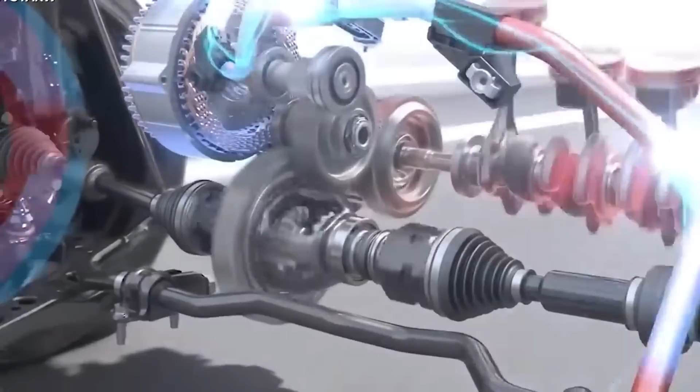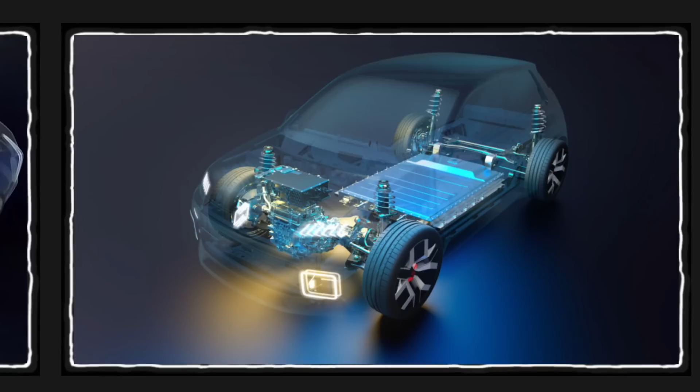Toyota, the global automotive leader, faces stiff competition from the burgeoning EV market and emerging rivals. To maintain its dominance, Toyota is unveiling a groundbreaking engine designed to reshape the industry. What sets this engine apart, and how will it revolutionize the automotive landscape? Join us as we reveal Toyota's new engine that aims to surpass the EV market.

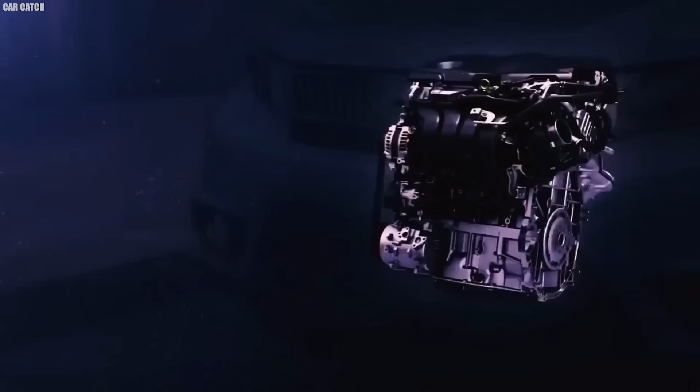The demand for traditional engines. In a world where electric vehicles are the talk of the town, Toyota has proven that there's still a strong demand for traditional engines. The Japanese automaker had its best year ever in 2023, selling an astonishing 11.2 million vehicles worldwide. But here's the surprising part. Electric cars contributed only a mere

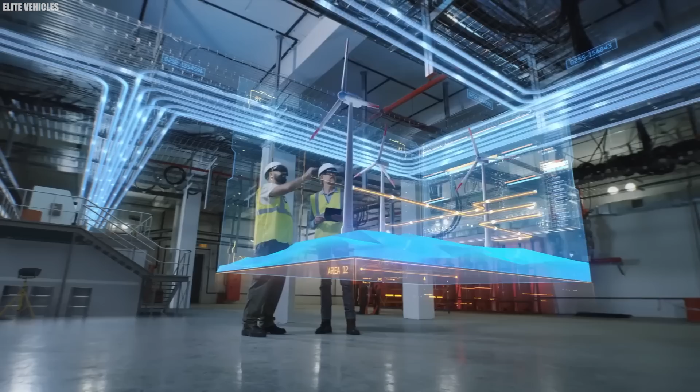0.926% to this success. That's right, out of the 11.2 million vehicles sold, only around 100,000 were electric. It's clear that despite the growing popularity of electric vehicles, many consumers still prefer the familiarity and reliability of traditional engines. Toyota's chairman believes that people should have the freedom to choose the type of vehicle that best suits their needs and preferences, without feeling pressured to go electric.

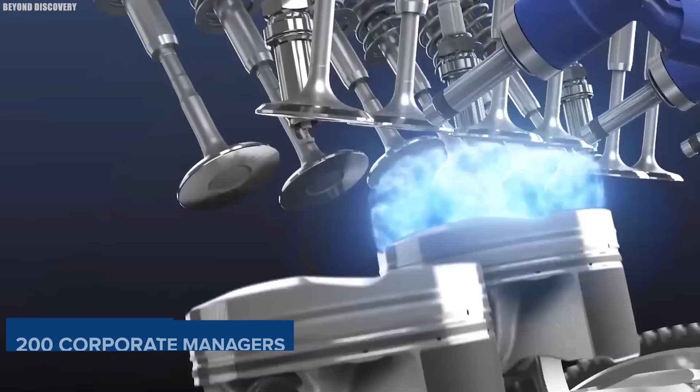He emphasized this point during a speech to 200 corporate managers and executives, where he also hinted at plans for a significant engine project that he had previously discussed at the 2024 Tokyo Auto Salon. But why is Toyota, a company known for its innovative hybrid technology, not fully embracing the electric vehicle trend?

The answer lies in their belief that the market for electric cars will be limited. Toyota estimates that even with technological advancements, electric vehicles will make up at most 30% of the market, with the remaining 70% consisting of traditional engines, hybrid cars, and fuel cell electric vehicles. This diverse approach to powertrain options allows Toyota to cater to a wider range of customers and driving conditions.

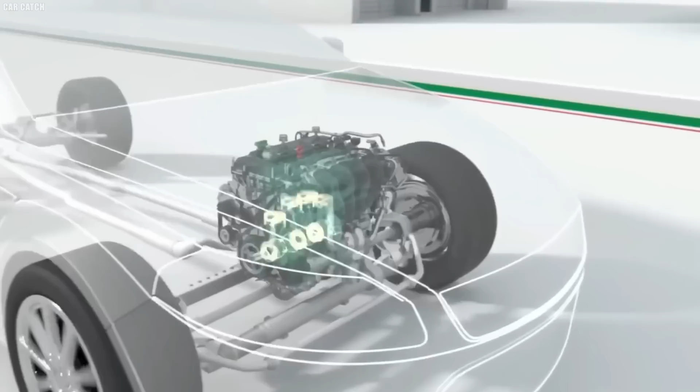Interestingly, Toyota sees hydrogen-powered engines as a promising solution for the future. By investing in the development of hydrogen technology, Toyota aims to offer vehicles that combine the benefits of clean energy with the performance and convenience of traditional engines.

Toyota's new combustion engine project for 2024. Toyota has been making waves in the automotive industry with its revolutionary approach to engine technology. While other manufacturers are rushing to go all-electric, Toyota has taken a bold step in a different direction. At the 2024 Tokyo Auto Salon, the company announced plans for a groundbreaking combustion engine project that has the potential to change the game. So, what makes this new engine so special?

For starters, it's no ordinary combustion engine. Toyota has developed a hydrogen-powered engine that promises to deliver the performance of a traditional gasoline engine while emitting only water as a byproduct. This engine runs on hydrogen, one of the most abundant elements in the universe, and produces zero harmful emissions.

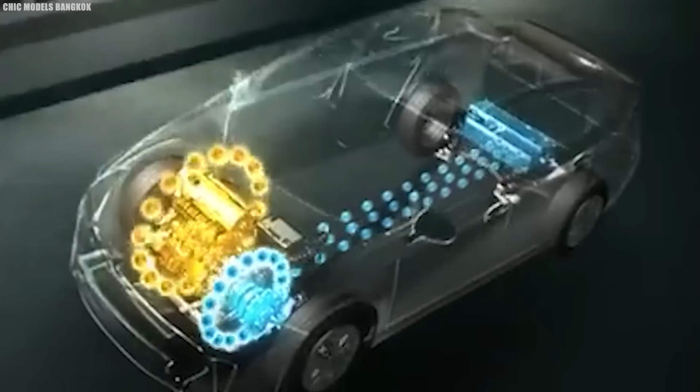But how does it work? The engine itself is quite similar to Toyota's existing hydrogen-powered models, such as the Corolla Cross H2 concept car. It features a 1.6-liter turbocharged 3-cylinder engine that has been specifically designed to run on hydrogen fuel. The hydrogen is stored in high-pressure tanks, similar to those in Toyota's fuel cell electric vehicle, FCEV, the Mirai. When the hydrogen is injected into the engine and ignited, it produces power just like a regular gasoline engine, but with the added benefit of being virtually pollution-free.

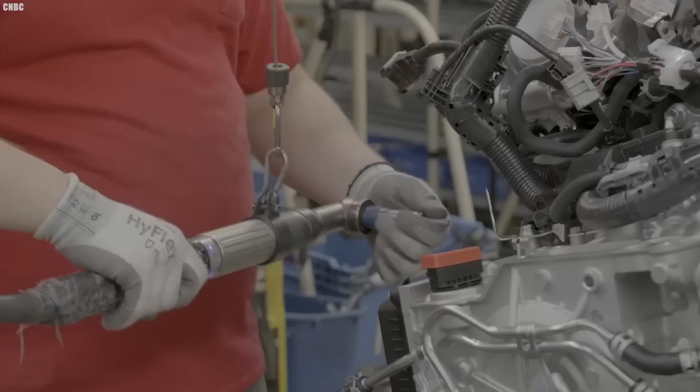One of the key advantages of Toyota's hydrogen engine is its versatility. Unlike electric vehicles, which require lengthy charging times and have limited range, hydrogen-powered cars can be refueled quickly and offer a driving range comparable to gasoline vehicles. This makes them a more practical option for people who need to travel long distances or don't have easy access to charging infrastructure.

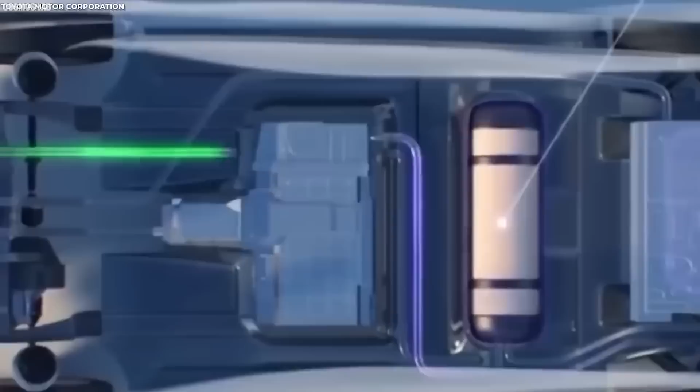Automakers' plans to switch to electric vehicles. While Toyota is making waves with its innovative hydrogen-powered engine, other automakers are doubling down on their plans to go all-electric. Many major players in the industry have set ambitious targets to phase out traditional combustion engines and shift their focus entirely to electric vehicles. One of the most notable examples is Jaguar, the iconic British luxury car brand. The company has announced that it will become an all-electric luxury brand by 2025, making it the first major automaker to commit to a completely electric lineup.

This move is part of Jaguar Land Rover's larger strategy to achieve net zero carbon emissions across its supply chain, products, and operations by 2039.

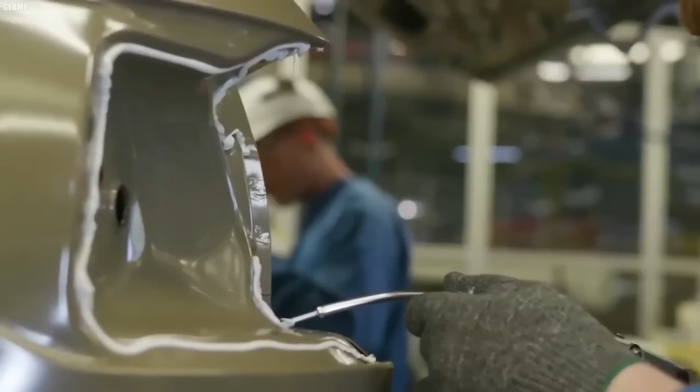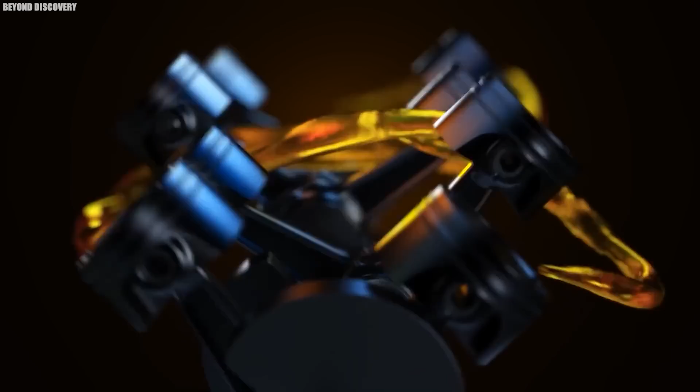Other luxury automakers are following suit. Bentley, known for its opulent vehicles, has pledged to offer only electric cars by 2030. Aston Martin, the British manufacturer famous for its association with James Bond, has also announced plans to electrify its entire lineup by the end of the decade. Even Rolls-Royce, the epitome of automotive luxury, is embracing the electric revolution with its first fully electric model, the Spectre, set to launch in 2023.

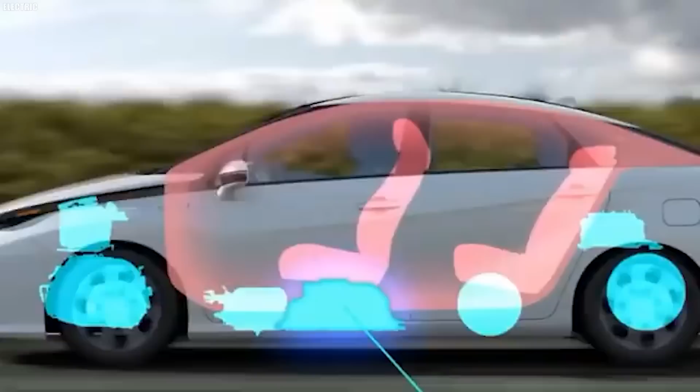But it's not just the luxury segment that's going electric. Mass-market automakers are also setting ambitious targets. Chrysler, the American automaker known for its minivans and muscle cars, has announced plans to go all-electric by 2028. The company's first battery electric vehicle, BEV, is set to debut in 2025, with additional models to follow in the coming years.

Volkswagen, one of the world's largest automakers, has also set its sights on electric dominance. The German company aims to launch 70 all-electric models by 2030 and expects BEVs to account for 50% of its global sales by the same year. To support this transition, Volkswagen is investing heavily in battery technology and charging infrastructure.

Mercedes-Benz, another German automaker, has announced plans to go all-electric by the end of the decade, provided that market conditions allow. The company is preparing to launch 3 new electric vehicle platforms in 2025, which will form the basis for a wide range of models across its lineup.

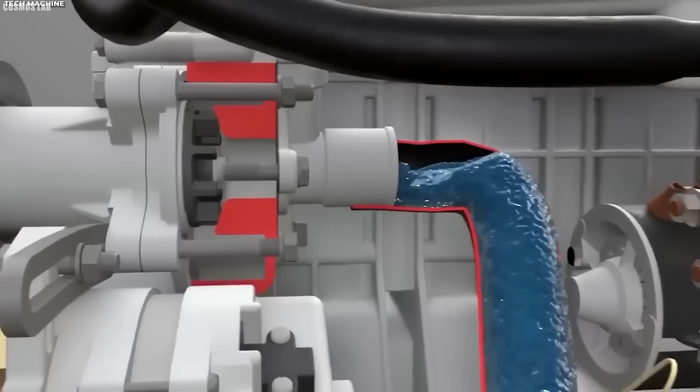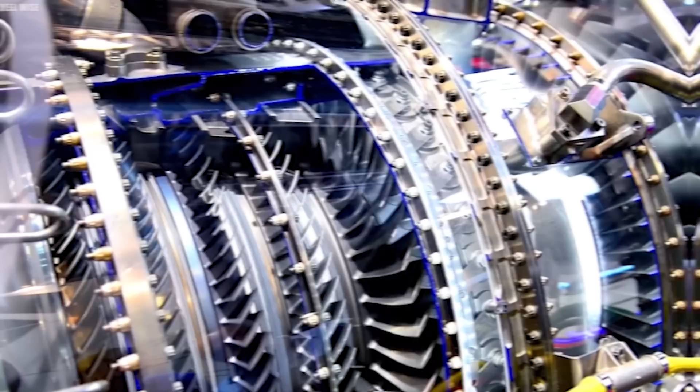Even Toyota's own luxury division, Lexus, has pledged to offer only electric vehicles in Europe, North America, and China by 2030. The brand aims to achieve carbon neutrality across its entire value chain by 2050, with electrification playing a key role in reaching this goal.

How hydrogen-powered engines work. Hydrogen-powered engines are a fascinating technology that promises to revolutionize the automotive industry. But how exactly do they work?

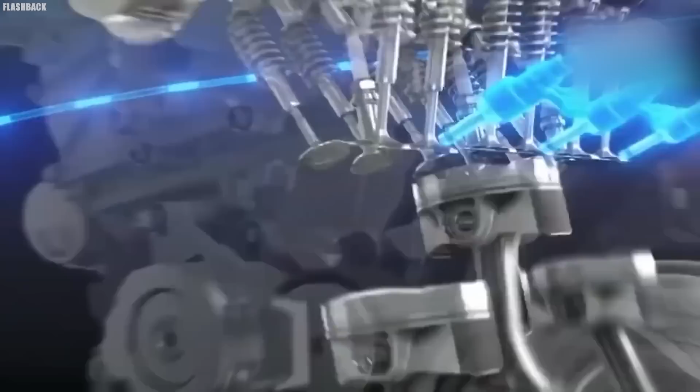At the heart of a hydrogen engine is a process called electrolysis, which involves extracting energy from water by separating hydrogen and oxygen atoms. To understand this process, let's take a closer look at water's molecular structure. Scientifically known as H2O, water consists of 2 hydrogen atoms bonded to a single oxygen atom. By applying an electric current to water, we can break these bonds and split the molecule into its constituent parts, hydrogen and oxygen gas. Once separated, the hydrogen gas becomes a potent fuel source.

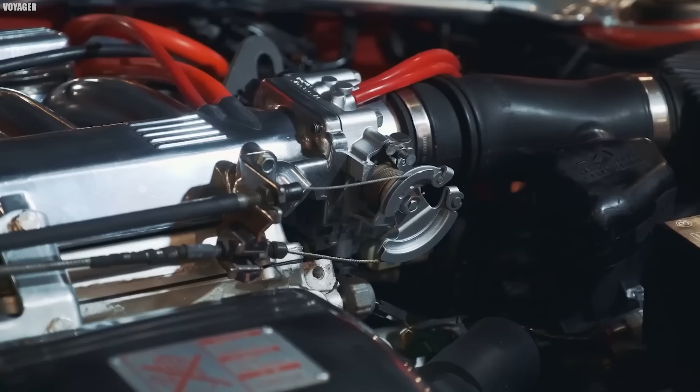In fact, hydrogen has the highest specific energy density of any non-nuclear power source, meaning it packs a serious punch when it comes to generating energy. This is where the real magic of a hydrogen engine happens. Inside the engine, the hydrogen gas is injected into the combustion chamber, just like gasoline in a traditional engine. However, instead of mixing with air and igniting to create an explosion, the hydrogen gas undergoes a chemical reaction with oxygen. This reaction produces heat, which drives the engine's pistons and generates power.

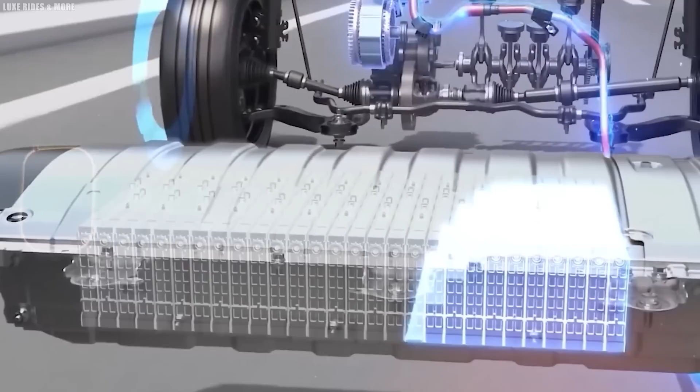But here's the best part. The only byproduct of this reaction is pure water vapor. That's right, a hydrogen engine only emits water from its tailpipe. This makes it an incredibly clean and environmentally friendly alternative to gasoline-powered engines, which release harmful carbon dioxide and other pollutants into the atmosphere. To make this process work efficiently, hydrogen engines require some special components.

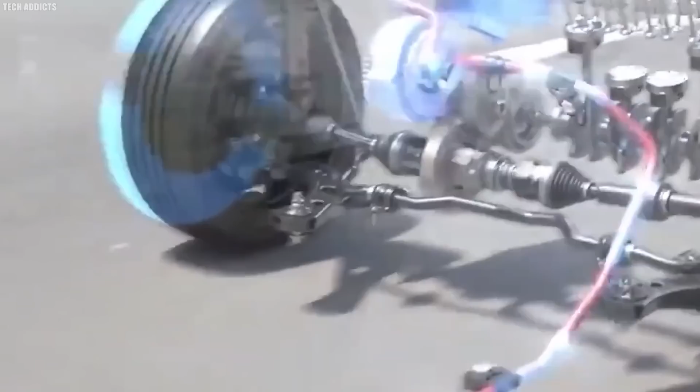The fuel injectors, for example, need to be designed to handle the unique properties of hydrogen gas, which is much lighter and more flammable than gasoline. The cylinder heads, pistons, and valves also need to be reinforced to withstand the high pressures and temperatures generated by hydrogen combustion. Despite these challenges, Toyota has made significant strides in developing practical hydrogen engines.

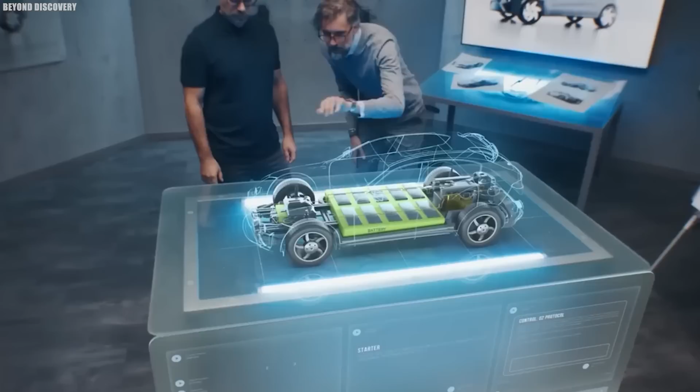The company's latest prototype, the Corolla Cross H2 concept car, features a 1.6-liter turbocharged 3-cylinder engine that runs entirely on hydrogen. With a range of around 300 miles and a refueling time of just a few minutes, this vehicle showcases the potential of hydrogen power to compete with traditional gasoline engines.

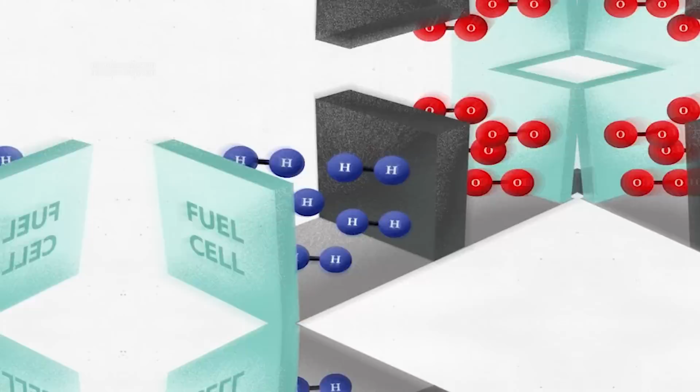Of course, there are still some hurdles to overcome before hydrogen engines can become a mainstream technology. Infrastructure for producing and distributing hydrogen fuel is still limited, and the cost of hydrogen vehicles remains higher than their gasoline counterparts. However, with continued investment and innovation from companies like Toyota, it's only a matter of time before hydrogen power becomes a viable option for drivers around the world.

New fuel technologies. When it comes to alternative fuel technologies, there are a few key players in the game.

Hydrogen combustion engines, fuel cell electric vehicles (FCEVs), and the new one that's making waves, water engines. But how do these different technologies stack up against each other? First, let's take a closer look at how water engines work.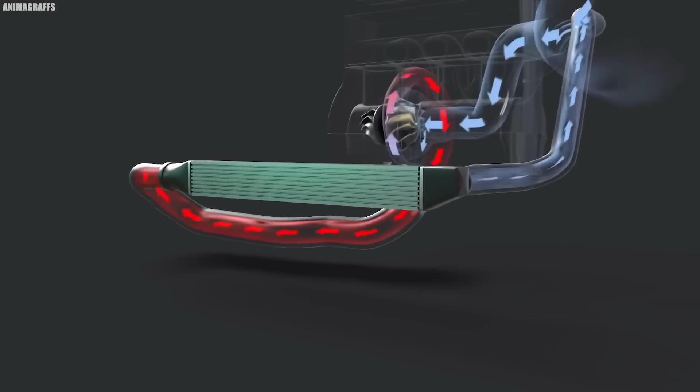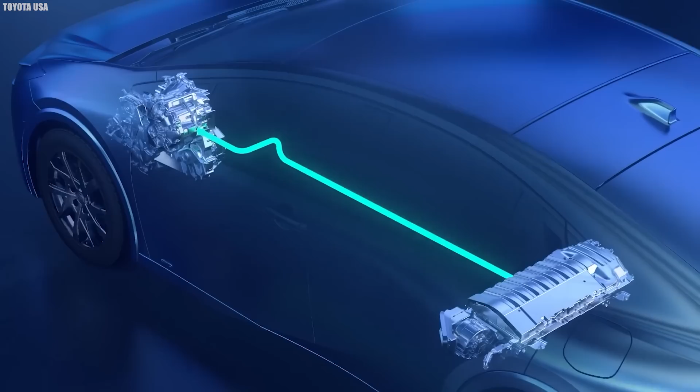A water engine uses water as its primary fuel source. The engine extracts hydrogen from water molecules through a process that involves passing an electric current through the water. The resulting hydrogen gas is then used to power the engine, either through combustion or in a fuel cell. The byproduct of this process is pure water vapor, making it an incredibly clean and environmentally friendly alternative to traditional fossil fuels.

But the benefits of water engines don't stop there. When it comes to storage, water engines have a clear advantage over their competitors. Unlike hydrogen combustion engines and FCEVs, which require specialized storage systems to keep the hydrogen fuel under high pressure and at specific temperatures, water engines can use plain old H2O as their fuel source. This means the fuel can be stored in virtually any plastic container, making it incredibly easy and inexpensive to transport and distribute. In contrast, the specialized storage systems required for hydrogen fuel can be bulky, heavy, and expensive, adding significant cost and complexity to the vehicle.

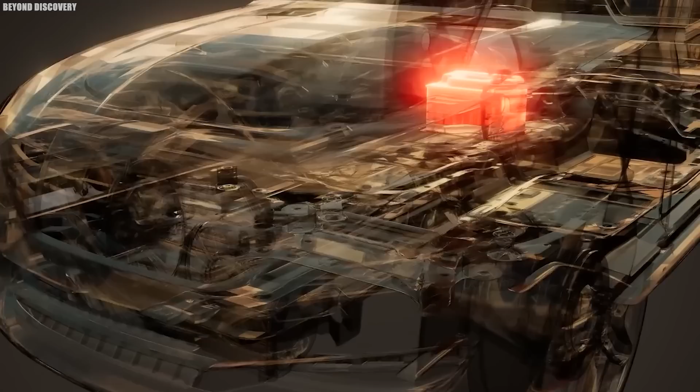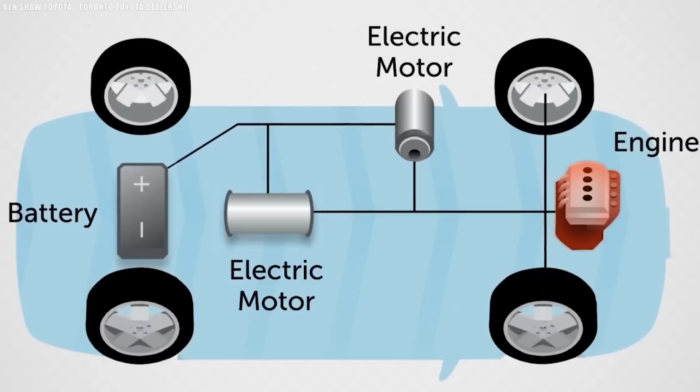But it's not just the storage systems themselves. The process of producing and storing hydrogen fuel is also a major factor to consider. Hydrogen is notoriously difficult to contain, as it can easily escape through even the tiniest of leaks. This means storage tanks for hydrogen fuel need to be heavily reinforced and constantly monitored, which adds even more cost and complexity to the equation. In fact, some estimates suggest that the cost of producing and storing hydrogen fuel could be up to 3 times higher than the cost of producing and storing gasoline.

So what does this mean for consumers? Well, it's pretty simple: higher costs. Because of the expensive storage systems and production processes required for hydrogen fuel, the price of hydrogen-powered vehicles is likely to be significantly higher than that of traditional gasoline-powered vehicles. This could make hydrogen combustion engines and FCEVs a tough sell for many consumers, especially those on a tight budget.

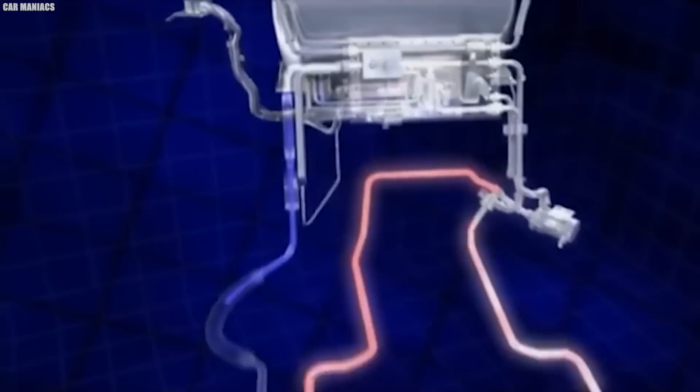But what about the environmental impact? This is where water engines really shine. Because they use water as their fuel source, water engines produce zero emissions, aside from a small amount of water vapor. This makes them an incredibly clean and environmentally friendly alternative to traditional gasoline engines, which emit harmful pollutants like carbon dioxide and nitrogen oxides. Hydrogen combustion engines and FCEVs are also much cleaner than gasoline engines, but they still produce some emissions in the form of water vapor and trace amounts of nitrogen oxides.

Of course, there are still some challenges to overcome when it comes to water engines. For one, the technology is still relatively new and untested, so there are likely to be some snags to resolve in the early stages of development. Additionally, the infrastructure for distributing and storing water as a fuel source is not yet in place, which could make it difficult for water engines to gain widespread adoption in the short term.

The internet was recently abuzz with a major headline from Toyota's CEO: 'This new engine will destroy the entire EV industry.' In an ambitious move to compete with the growing electric vehicle market, Toyota announced its development of a revolutionary water-powered engine. Yes, you heard that right. An engine fueled by nothing but ordinary H2O.

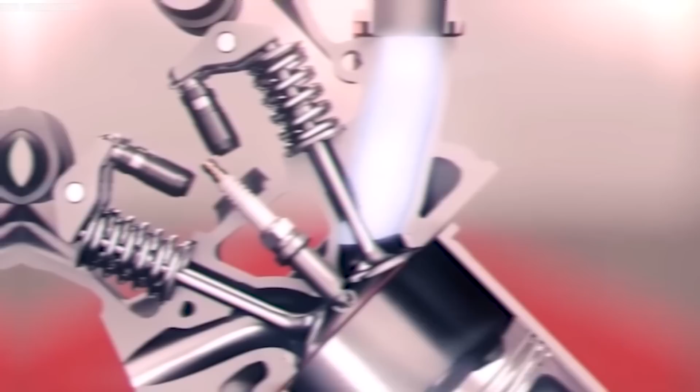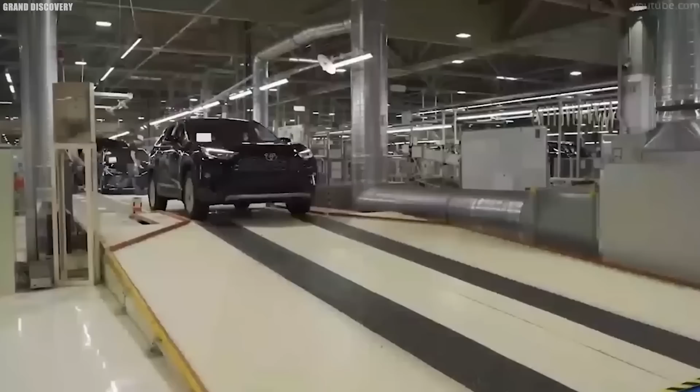Despite the excitement, developing a viable water-powered engine faces significant hurdles. Hydrogen storage is a major challenge, as it's a highly flammable gas requiring specialized high-pressure tanks. This adds complexity, cost, and potential safety risks to the vehicle. Nevertheless, Toyota remains optimistic about the potential of water-powered engines to revolutionize the automotive industry. The company has filed numerous patents and is actively developing prototypes and proof-of-concept vehicles. If Toyota succeeds in overcoming these challenges, this new technology could indeed disrupt the EV market, challenging its dominance and potentially reshaping the automotive landscape.

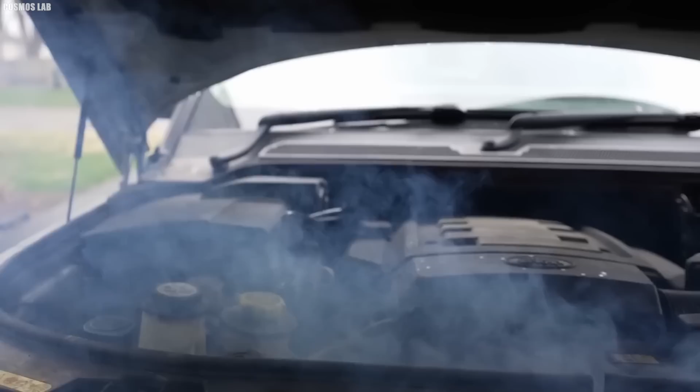Daily usability and performance. When it comes to alternative fuel technologies, one of the biggest concerns for consumers is how well they will perform in everyday driving situations. After all, what good is a fancy new engine if it can't get you from point A to point B reliably and efficiently? Fortunately, water engines have a lot to offer in terms of daily usability and performance. First and foremost, water engines pack a serious punch when it comes to energy output.

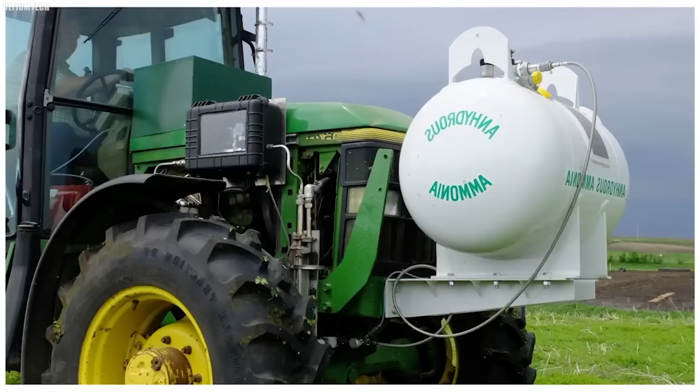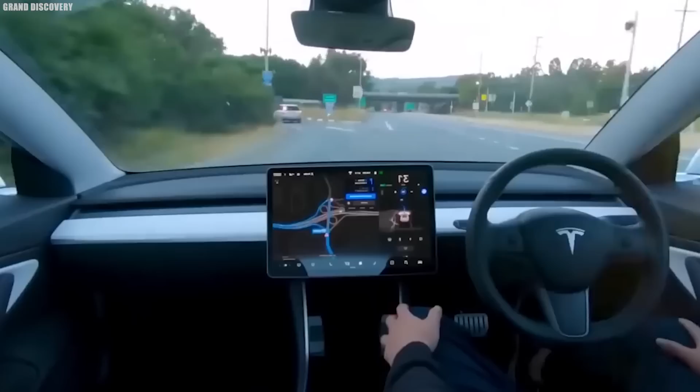In fact, some estimates suggest that water-powered engines could generate up to 3 times more megajoules of energy than traditional gasoline engines. This means water engines could potentially offer better acceleration, higher top speeds, and longer driving ranges than their gasoline-powered counterparts. But it's not just raw power.

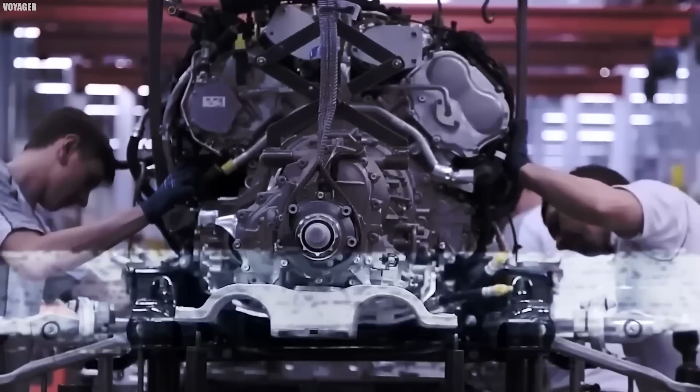Water engines also have some inherent safety advantages over other types of alternative fuel technologies. Because water is a non-flammable, non-toxic substance, the risk of fires or explosions in a water-powered vehicle is extremely low. This is in stark contrast to hydrogen combustion engines and fuel cell electric vehicles, which use highly flammable hydrogen gas as their fuel source. In the event of a crash or malfunction, a hydrogen-powered vehicle could potentially turn into a veritable bomb on wheels, putting the driver and passengers at serious risk.

Another major advantage of water engines is their relative simplicity and ease of production. Unlike electric vehicles, which require complex and expensive battery systems, water engines can be manufactured using many of the same components and production processes as traditional gasoline engines. This means automakers could potentially retool their existing manufacturing facilities to produce water engines, rather than having to build entirely new production lines from scratch.

But perhaps the biggest selling point for water engines is their cost effectiveness. Because water is an abundant and easily accessible resource, the cost of fueling a water-powered vehicle is likely to be much lower than the cost of fueling a gasoline-powered vehicle or an electric vehicle. In fact, some experts predict that the cost per mile of driving a water-powered vehicle could be as much as 50% lower than the cost of driving a gasoline-powered vehicle.

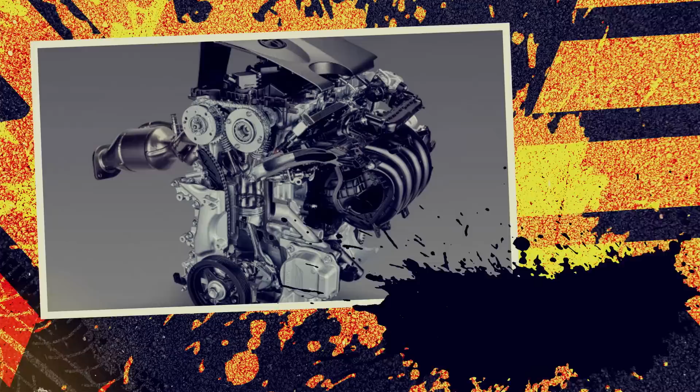Challenges and limitations. While hydrogen engines and water engines show immense promise as alternative fuel technologies, it's important to acknowledge the challenges and limitations that these industries currently face. From infrastructure and logistical issues to safety concerns and potential opposition from established players in the automotive industry, there are a number of hurdles that must be overcome before hydrogen and water engines can become mainstream.

One of the biggest challenges facing the hydrogen engine industry is the lack of infrastructure for producing, distributing, and storing hydrogen fuel. Unlike gasoline, which can be easily transported and stored using existing infrastructure, hydrogen requires specialized pipelines, storage tanks, and fueling stations. Building out this infrastructure from scratch would be a massive undertaking, requiring significant investment and coordination between government agencies, private companies, and local communities.

Another major challenge is the issue of hydrogen storage itself. As a gas, hydrogen is extremely difficult to compress and store in a way that is both safe and efficient. Current hydrogen storage systems are bulky, heavy, and expensive, which adds significant cost and complexity to hydrogen-powered vehicles. Additionally, hydrogen gas can be highly flammable and explosive if not handled properly, which raises serious safety concerns for both drivers and mechanics.

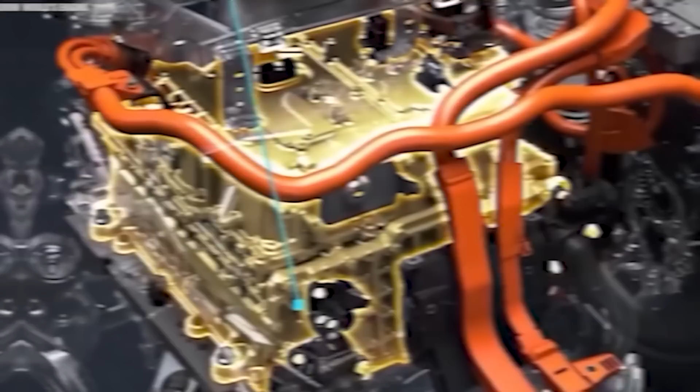Speaking of safety, hydrogen engines also face potential opposition from regulatory agencies and consumer advocacy groups who may be wary of the risks associated with hydrogen fuel. In the event of a crash or malfunction, a hydrogen-powered vehicle could potentially turn into a veritable bomb on wheels, putting the driver and passengers at serious risk. While companies like Toyota are working hard to address these safety concerns through advanced engineering and rigorous testing, it may take some time to convince the public that hydrogen-powered vehicles are truly safe and reliable.

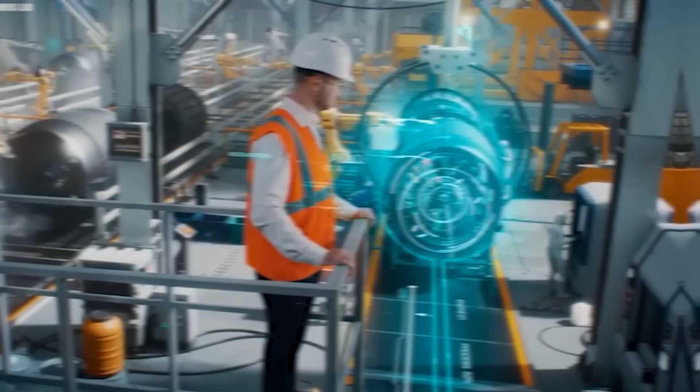But perhaps the biggest challenge facing the hydrogen engine industry is the potential opposition from established players in the automotive industry. Companies like Tesla and General Motors have invested heavily in electric vehicle technology, and they may see hydrogen engines as a threat to their bottom line. Additionally, oil and gas companies may be reluctant to support the development of alternative fuel technologies that could undermine their core business model. Despite these challenges, however, there are also a number of factors working in favor of the hydrogen engine industry.

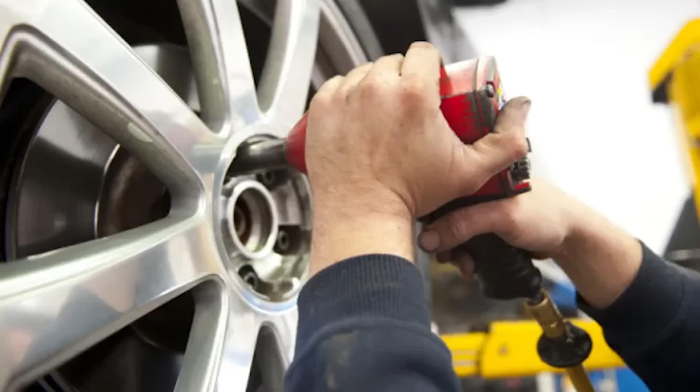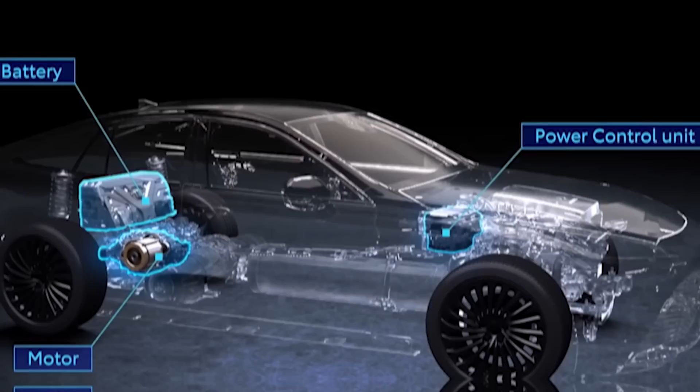For one, hydrogen engines have the potential to significantly reduce greenhouse gas emissions and combat climate change, which is becoming an increasingly urgent priority for governments and consumers alike. Additionally, hydrogen engines could help reduce our dependence on foreign oil, which has important geopolitical implications. Furthermore, the development of hydrogen engines could create new economic opportunities and jobs in the automotive industry, particularly in areas related to fuel production, distribution, and storage. As more companies invest in hydrogen engine technology, we can see the emergence of a whole new ecosystem of suppliers, manufacturers, and service providers, all working together to bring this technology to market.

Toyota's 1.6-liter three-cylinder turbo hydrogen engine.

When it comes to alternative fuel technologies, Toyota is a company that is always pushing the boundaries of what's possible. Their latest innovation is a 1.6-liter three-cylinder turbo hydrogen engine that promises to combine the power and performance of a traditional gasoline engine with the environmental benefits of hydrogen fuel. Let's take a closer look at this groundbreaking technology and what it could mean for the future of the automotive industry.

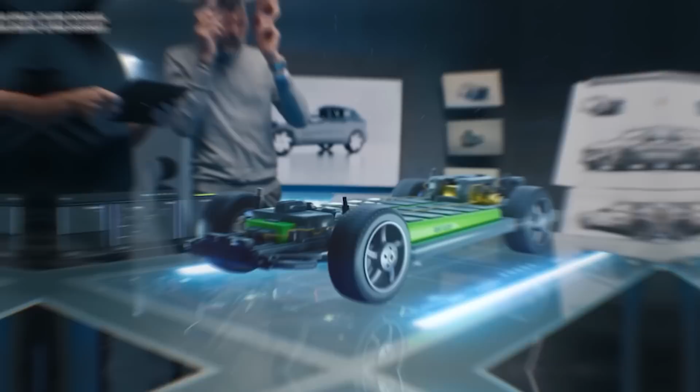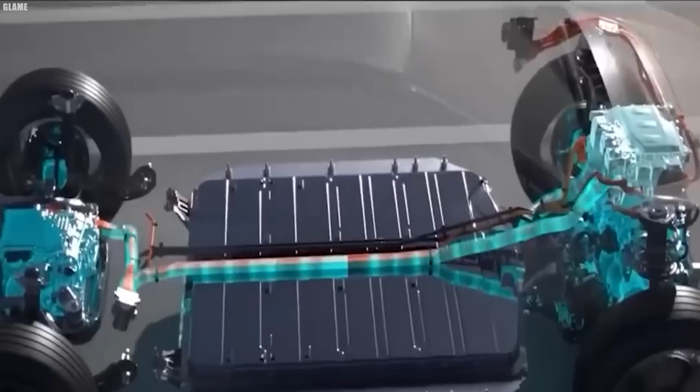At the heart of Toyota's new engine is a 1.6-liter three-cylinder turbocharged power plant that is based on the same platform as the engine found in the GR Yaris, a high-performance hatchback that has been praised for its speed and agility. However, unlike the GR Yaris engine, which runs on gasoline, Toyota's new engine has been specifically designed to run on hydrogen fuel.

To make this possible, Toyota's engineers had to make a number of significant modifications to the engine. For one, they had to replace the traditional fuel injection system with a high-pressure hydrogen direct injection system that can deliver the hydrogen fuel directly into the engine's combustion chamber. This allows more precise control over the fuel-air mixture and helps optimize performance and efficiency.

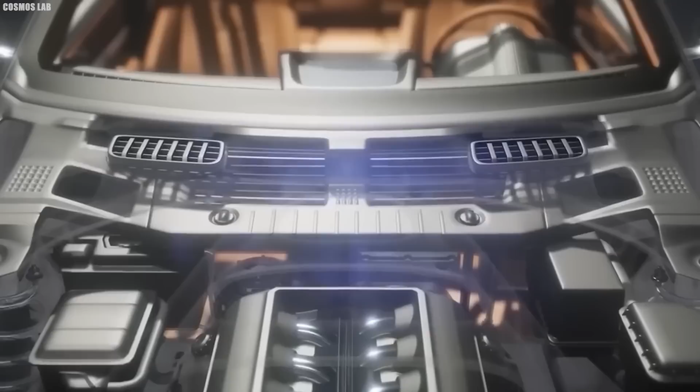Another key modification was the addition of a specially designed turbocharger that can handle the unique properties of hydrogen fuel. Because hydrogen is a much lighter gas than gasoline, it requires a different type of turbocharger that can spin at much higher speeds and generate more boost pressure. Toyota's engineers were able to develop a turbocharger that can operate at up to 150,000 RPM, which is significantly higher than the turbochargers used in traditional gasoline engines.

But perhaps the most impressive aspect of Toyota's new engine is its performance. Despite running on hydrogen fuel, which has a lower energy density than gasoline, the 1.6-liter three-cylinder turbo engine is able to produce an impressive 295 horsepower. This is largely thanks to the high-pressure hydrogen direct injection system, which allows for a more efficient combustion process and helps to extract more power from the fuel.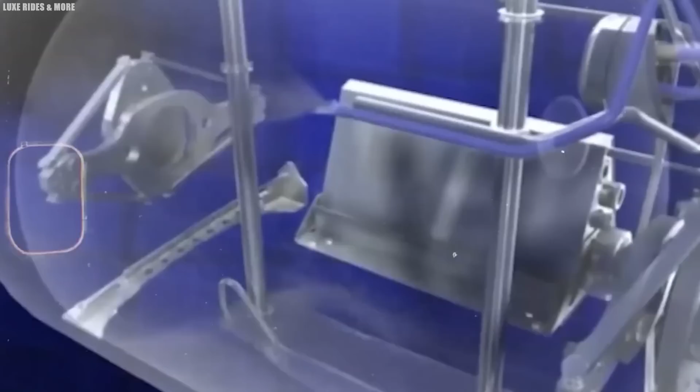Of course, performance is only one part of the equation when it comes to alternative fuel technologies. The other key factor is environmental impact, and this is where Toyota's new engine really shines. Because it runs on hydrogen fuel, which produces only water vapor as a byproduct of combustion, the 1.6-liter three-cylinder turbo engine has the potential to significantly reduce greenhouse gas emissions and combat climate change.

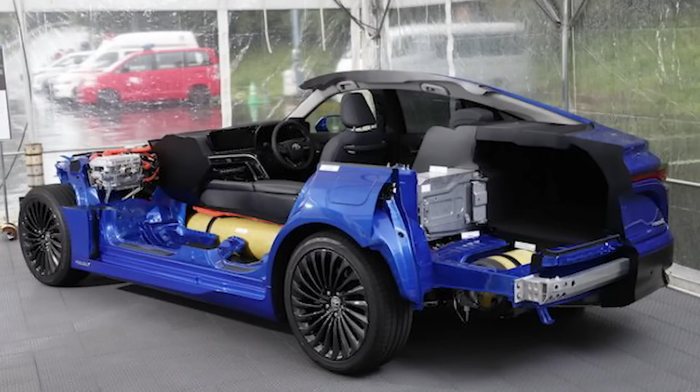In fact, Toyota has already begun testing the engine in a modified version of the Corolla Cross, a popular crossover SUV. The Corolla Cross H2 concept, as it's known, has been undergoing real-world testing in Japan, and the results so far have been extremely promising. According to Toyota, the Corolla Cross H2 concept has a driving range of around 400 miles on a single tank of hydrogen fuel, which is comparable to many gasoline-powered vehicles.

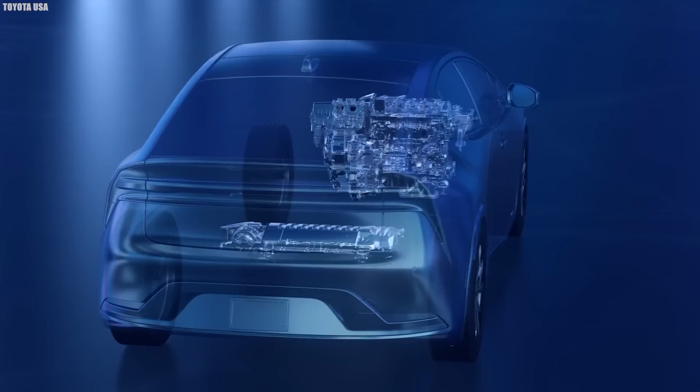But Toyota isn't stopping there. They are also working on developing a hydrogen fuel cell system that can be used in conjunction with the 1.6-liter three-cylinder turbo engine to create a hybrid powertrain that is even more efficient and environmentally friendly. This system would use a fuel cell to generate electricity from hydrogen fuel, which could then be used to power an electric motor and provide additional torque and power to the engine.

Performance and driving experience of hydrogen-powered vehicles. Performance is often a major concern for drivers, and the biggest question always on their minds is whether a hydrogen-powered car can keep up with its gasoline-powered counterparts. Can it provide the same performance that car enthusiasts crave?

The answer, according to Toyota, is a resounding yes. Toyota's hydrogen-powered vehicles, such as the Mirai and the experimental Corolla Cross H2 concept, boast impressive performance specs that rival those of traditional gasoline engines. The Mirai, for example, can produce up to 182 horsepower, allowing it to accelerate from 0 to 60 miles per hour in just 9.2 seconds. While this may not be on par with high-performance sports cars, it's more than enough power for everyday driving situations.

But it's not just raw power. Toyota's hydrogen-powered vehicles also deliver a driving experience that feels remarkably similar to that of a gasoline-powered car. The throttle response is instant and linear, providing a sense of immediacy and control that is often lacking in electric vehicles.

The engine sound, while different from a traditional gasoline engine, still provides a satisfying growl that enhances the driving experience. In fact, Toyota has even proven hydrogen power potential in high-performance applications.

In 2021, the company entered a modified Corolla Sport equipped with a hydrogen-powered engine in the Super Taikyu series, a grueling endurance racing series in Japan. The car, based on the GR Yaris platform, competed in the ST-Q class and demonstrated impressive speed and reliability, completing the race without any major issues.

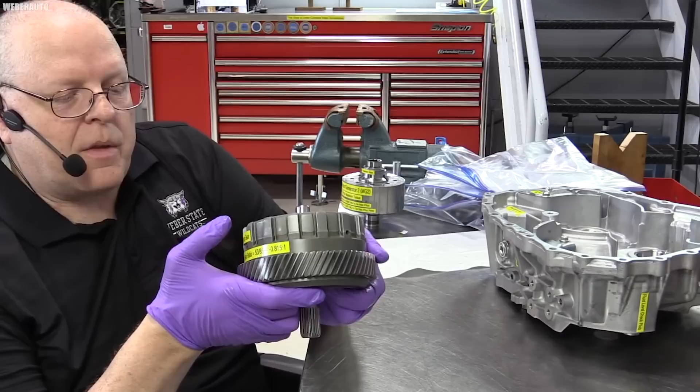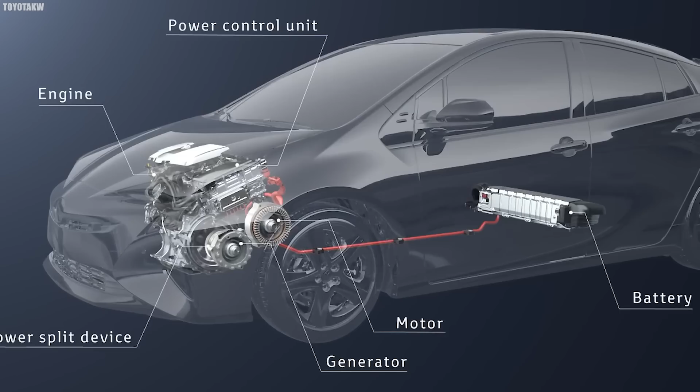But hydrogen power's benefits go beyond performance. Hydrogen-powered vehicles also offer significant environmental advantages over traditional gasoline engines and even hybrid electric vehicles (HEVs) and plug-in hybrid electric vehicles (PHEVs). The most obvious benefit is the lack of CO2 emissions. When hydrogen is used as a fuel, the only byproduct of the combustion process is water vapor. That means hydrogen-powered vehicles can operate with zero CO2 emissions, making them a much cleaner alternative to gasoline engines.

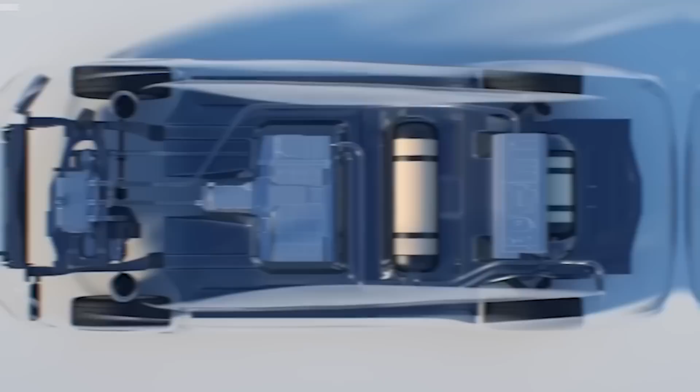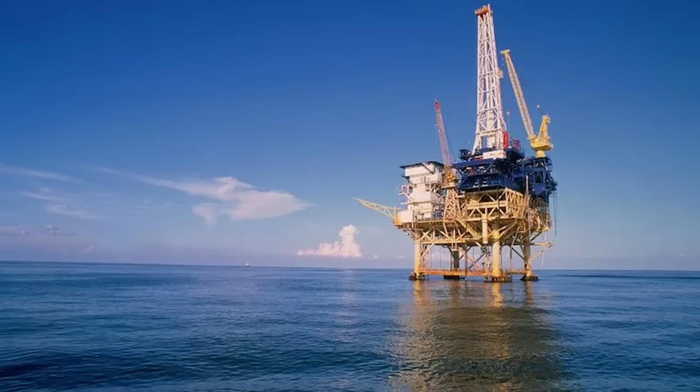But the environmental benefits don't stop there. The process of producing hydrogen fuel can also be much cleaner than the process of extracting and refining fossil fuels. When hydrogen is produced using renewable energy sources, such as solar or wind, the entire fuel life cycle becomes carbon neutral. This stands in stark contrast to the production of gasoline, which involves drilling for oil, transporting it to refineries, and then burning it in engines, releasing CO2 and other pollutants into the atmosphere at every step of the process.

Even HEVs and PHEVs, which use a combination of gasoline and electric power, still rely on fossil fuels to some extent, and therefore contribute to greenhouse gas emissions.

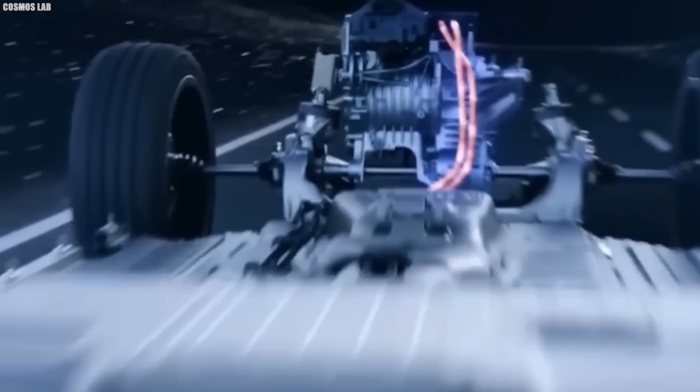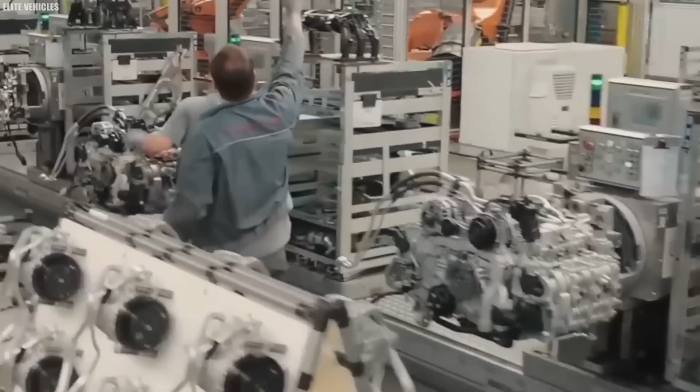Toyota's multi-technology approach to achieving carbon neutrality. When it comes to achieving carbon neutrality in the automotive industry, there is no one-size-fits-all solution. Different regions have different energy sources, infrastructure, and environmental policies, which means that a single technology or approach may not be effective everywhere. Toyota recognizes this reality and has adopted a multi-technology approach to reducing its carbon footprint. Rather than putting all its eggs in one basket, the company is investing in a diverse range of technologies and strategies to achieve its goal of becoming carbon neutral by 2050.

One key pillar of Toyota's approach is the development of battery electric vehicles (BEVs). BEVs are powered solely by electricity stored in batteries and produce zero emissions during operation. Toyota has already launched several BEV models, including the bZ4X SUV and the Lexus RZ450e, and has plans to introduce many more in the coming years.

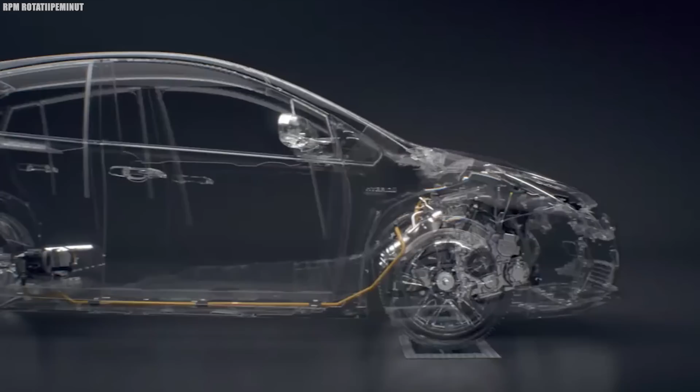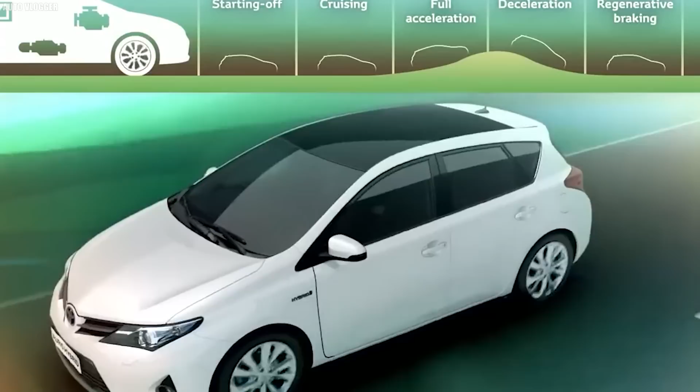However, Toyota also recognizes that BEVs are not a perfect solution for every situation. In regions with limited access to renewable energy sources or charging infrastructure, BEVs may actually have a higher overall carbon footprint than traditional gasoline-powered vehicles. That's why Toyota is also investing heavily in hydrogen fuel cell vehicles (FCEVs) and plug-in hybrid electric vehicles (PHEVs).

FCEVs, like the Toyota Mirai, use hydrogen as a fuel source to generate electricity, which powers an electric motor. The only byproduct of this process is water vapor, making FCEVs a highly attractive option for regions with access to renewable hydrogen production. PHEVs, on the other hand, combine a traditional gasoline engine with an electric motor and battery pack. This allows them to operate in purely electric mode for short distances, while still having the flexibility and range of a traditional gasoline-powered vehicle for longer trips.

Toyota has been a leader in PHEV technology for over two decades, with models like the Prius Prime and RAV4 Prime offering exceptional fuel efficiency and low emissions.

However, Toyota's commitment to sustainability goes beyond vehicle technology. The company is also investing in renewable energy projects, such as solar and wind power, to reduce the carbon footprint of its manufacturing operations. It is also working to develop more efficient production processes and recycling technologies to minimize waste and conserve resources. Perhaps most importantly, Toyota is taking a holistic view of the carbon neutrality challenge, recognizing that achieving this goal will require collaboration and coordination across multiple sectors and stakeholders.

The company is actively engaging with governments, energy companies, and other automakers to develop policies and infrastructure that will support the transition to a low-carbon future. With its multi-technology approach and its commitment to sustainability, Toyota is poised to be a key player in this fight and to help lead the way towards a cleaner, greener future for all.